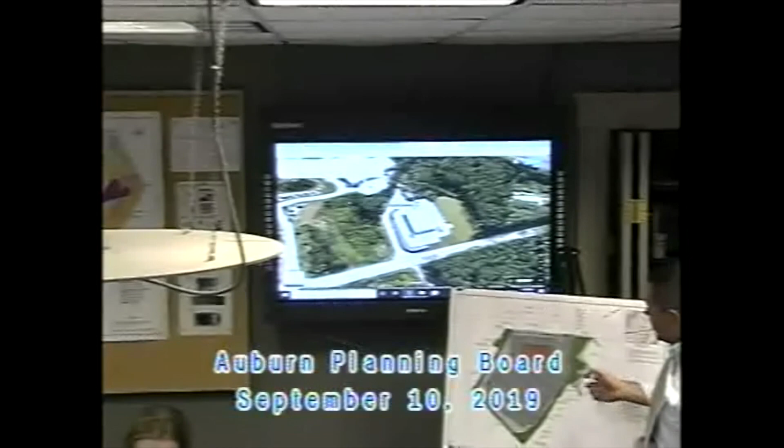Good evening, everyone. Patrick McCarty, McCarty Engineering. Here with me tonight is Neil Patrick, trustee of NJ Realty Trust. Thank you for having us back this evening to entertain a request to amend the approved site plan for the proposed Patrick Mazda project at 519 Washington Street. Oh, I'm sorry, 189, yeah. Got the Volvo Volkswagen on my head. 189 Washington Street.

So this is the plan that the board originally approved a couple months ago. Just to refresh everybody's memory, Route 20 here along the bottom, power lines, West Tech Drive, the existing cheerleading building that's now partially demolished. And this was the proposed Mazda dealership, and the access driveway ramped up from Washington Street to a platform that had the building and some parking. Then we continued to ramp up, and we had terraced parking as we went up the hill. So we had retaining wall parking several times up the hill.

After we received approval, we went through and did a full site work estimate. I think I mentioned to you last time that our company also self-performs the site work and builds the building. So we estimated this project, and it turned out to be pretty expensive to build the multiple tiers. The approved plan has 8 proposed retaining walls, a small one here, replacement of the one that's failing along the driveway, a small one here, and then 4, 5, 6, 7, and 8.

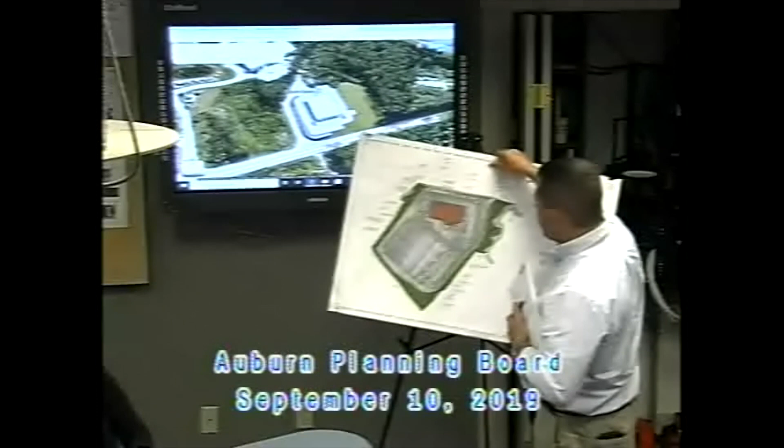So we had 8 retaining walls totaling almost 20,000 square feet of retaining wall face, and then a significant export of excess material. So having looked at that and realized that this design was going to be cost prohibitive, and I should note that the current approved plan has 388 parking spaces. So we did a little bit of redesign here. And we have the proposed plan that we're requesting the board's approval for.

The driveway stays the same, the whole building platform stays the same, retaining walls 1, 2, and 3 stay the same. Retaining wall 4 gets slightly taller, about 4 feet taller, and it also wraps up the driveway. And what this allows us to do is continue ramping all the way up to the top of the site. We off-grade a little bit from the property line to set this high corner elevation of the parking lot, and then we grade 5% diagonally across that, creating a more conventional parking layout. Spaces lining the perimeter, and then 3 rows of parking in the middle.

Saves us 4 retaining walls, which cuts the face of the retaining walls down almost in half. Saves some export of material, but the sacrifice is we only have 335 parking spaces now, so we're down 53 parking spaces from the original design. Not ideal for a car dealership, but gonna balance the economics of the site.

Did you say in the past that those were gonna be on the elevated areas, inventory cars? Or are they gonna be for the people? Inventory cars. And this is still inventory cars up here. The sales area will be on the first level where... Yeah, we have approximately 90 spaces down on this. So customers would come up, they'd park at the front of the showroom, they'd have parking here, service customers, everybody, all the business for the customers would occur on the same platform that's not changing. The new vehicle storage would just be now at the top of the hill rather than terraced up the hill.

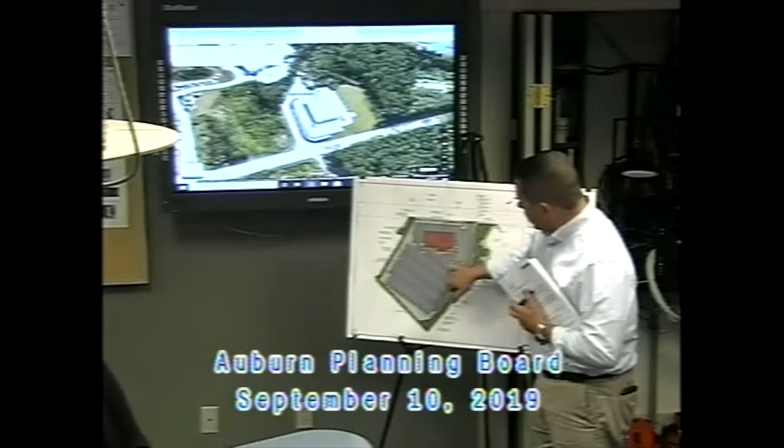It does reduce impervious area, obviously, because we're losing 50 spaces, so we have a reduction in impervious area, less retaining walls, less export. We had to redesign the drainage because each one of these tiers, they were all graded down, and there was a catch basin and an infiltrator at each one. So we had one large infiltrator here that we still have, and then we had 4 small ones. And now we have 2 big ones. One here and one here.

So the plans did go to Graves for peer review. They sent us a letter at about 4 o'clock today, which was great just to get it in time for the meeting. The 2 comments that they had was we have a condition on the original site plan approval that when we get down close enough to grade to dig the test pits, we're going to dig the test pits.

To confirm the depth of groundwater for the 2 infiltration basins. And then their second comment was on our StormTech detail sheet. One of them is still labeled as infiltration basin 5, even though now we only have 1 and 2. So it's fix the typo and do the test pits.

What was their request for the presence during the digging of the test holes? Yeah, that's a condition of site plan approval that would remain in effect, assuming the board acts favorably on this request. So the change would be the reference to the plans, the date of the plans in the site plan approval document. The rest of the document would remain the same.

And Adam, you concur with the 2 notes from Graves, and having an independent engineer witness the test pits? Mm-hmm. And I haven't fully read through this, but there are only very minor comments. Do we want to consider those tonight, or do we want to have opportunity to review those? We want to take the time to look at it. Yeah, it's very minor.

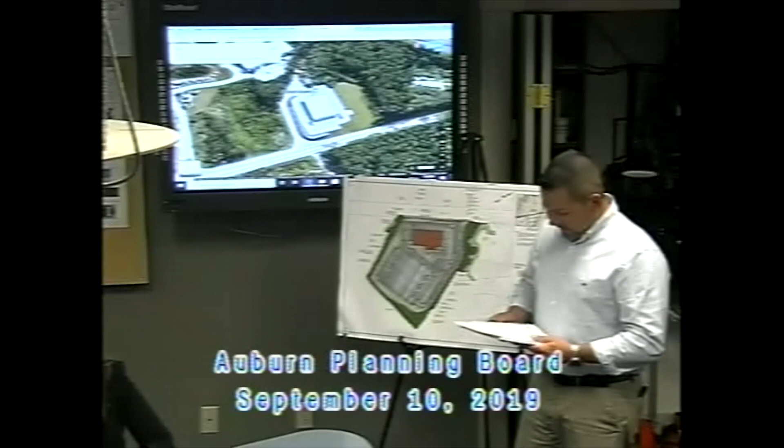Can we see that? Do you have? Because it's usually supposed to be here the Thursday before the meeting. Oh, their letter? Oh, yeah. Everything. You all right, Nick? Take a look. Structural review of the proposed deck. No, wrong letter, I'm sorry. Change packets. No decks. There you go. Definitely not done. Hydrology, water, culvert flow, pipe size calculations. Statement.

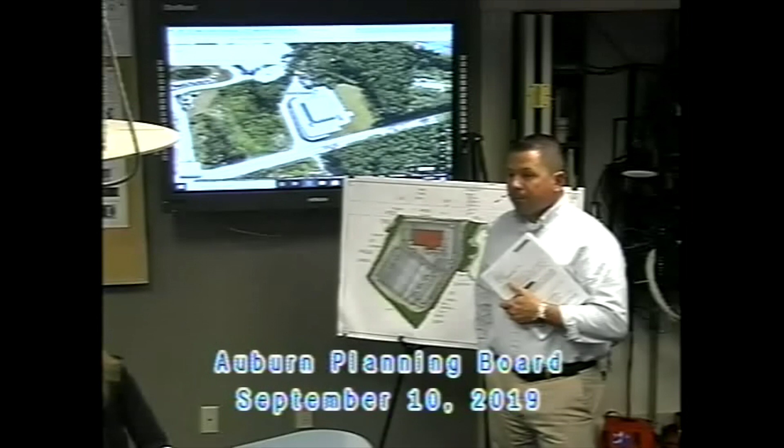Other questions, John? If he's done with his presentation, I got plenty. You all set? Okay, my first question is, we show the saw cut on page 2. That's within the state right of way? Yep. You got a permit from the state? I do. Two, actually. One for the curb cut and one for the sewer force main.

Page 4, general note 5: contractor shall strip topsoil and stockpile on site for reuse. Soil stockpile shall be no higher than 8 feet. Stockpile shall be enclosed by temporary silt fences to prevent travel of sediment to adjacent drainage ways. What about the hay bales or the wattles? We have wattles. That's not what it says. It just says silt fence. Your instructions to the contractor, which is you, is to put silt fence down. It doesn't say anything about wattles. Okay. Add that.

Drainage generated as a result of dewatering shall be discharged to existing drainage courses with proper erosion control measures. Discharge onto pavement or private property shall not be allowed. So there's no provision in there on how any silt that gets through the system is handled during the dewatering. There's a whole stormwater pollution prevention plan put together for the site, because we're disturbing more than an acre. So we have the SWPPP, we've been doing the inspections, we filed for coverage under the EPA general permit. And we haven't done any dewatering to date.

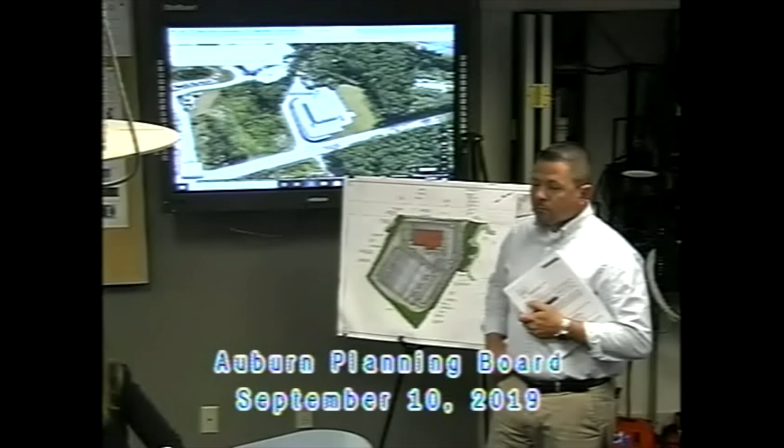When you tie into the new manhole, that has to be a core and seal boot as well. It says core, it just doesn't say anything about a boot on your note. On which one, John? Sheet 6. What number? No, it's not a number, it's on the plan itself. It says core new opening, where we tie into the existing manhole. It just has to say core and seal boot. So you'll add that to the plan?

Okay. The other thing, just a quick question on that. So we get the plans, they print them out, I get one page right side up, the next page is upside down. The state highway baseline on sheet 3, it's got an arrow, but it's pointing nowhere, there's no line on the page. I don't know if that was just the center of the highway or what. At least not on my copy. On sheet 3, right below proposed guide rail, state highway baseline.

It'd be nice if my set had sheet 3. Oh, here it is. State highway baseline, it's pointing to the middle line with the stationing. I think maybe the leader didn't show up on your copy. No stationing, no middle line, no nothing. Like you just showed, it's pointing in the middle of nowhere. Well, I think it's just your copy. See how it's light on mine? Here's the baseline and the stationing on the full size. I think it's just your half-size copy.

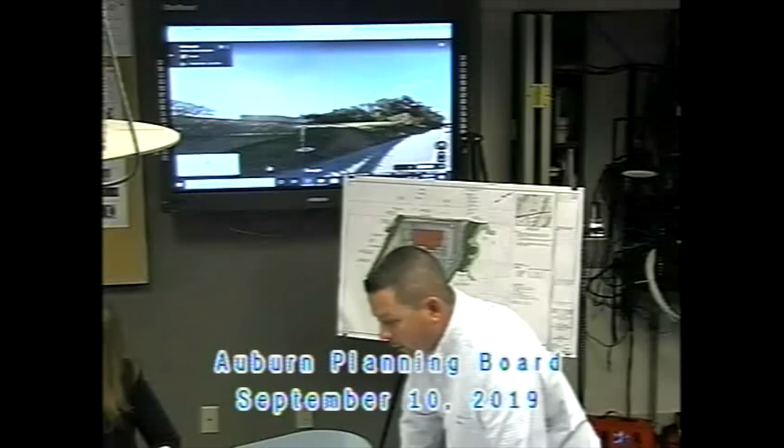What is this one, John? This is on the landscape plan. Yeah, so those trees are up here. Okay. You can't really tell where the center of the tree is the way it's drawn on the landscape plan, as far as concerned. So there's a Mass Highway bound right here. Yep, they're behind it. They're behind the Mass Highway bound. Thank you.

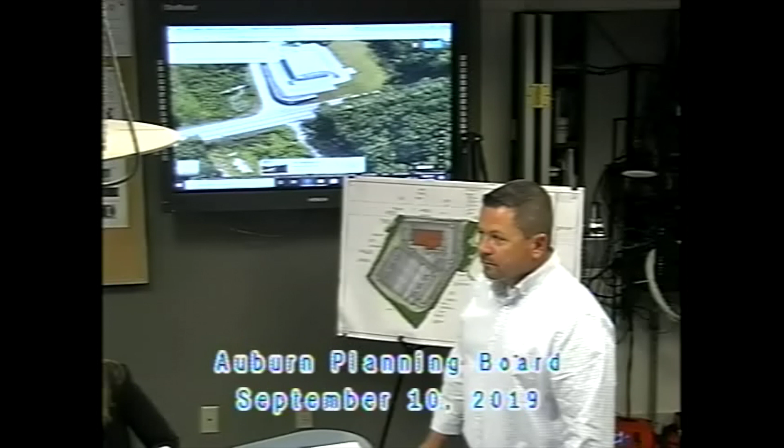I'd like to take another look at... Now we'll get to the details. I thought we went through these ones already.

Yeah, by E.J. Prescott. Mine says casting shall be covered to be LeBaron Type A mass standard product number 65306, set by E.J. Prescott, full bed of mortar. That's telling me that E.J. Prescott sent me frame and cover. Which detail are you looking at? Sheet 10, center of the page, top, one right below it. LeBaron.

They're in heavy. Yeah. E.J. Prescott. It's the next one down too. Yeah, he didn't write it the same. On the one below, he put by E.J. Prescott set in a full bed of mortar. He put the sets in the wrong place on the one up top. But I don't care about who sets it. I care about the reference to a company that no longer exists.

But they still call them out by that product number. They don't exist. LeBaron doesn't exist anymore. They've been bought out. It's time to upgrade your reference numbers, because you can't reference that. There's no more catalogs for LeBaron. You fixed it on the previous plan. You referenced Auburn Standard, which is fine with me. But here, there was no change on the sheet from the previous plan. Yeah, the frame and cover has been changed back to what it was originally.

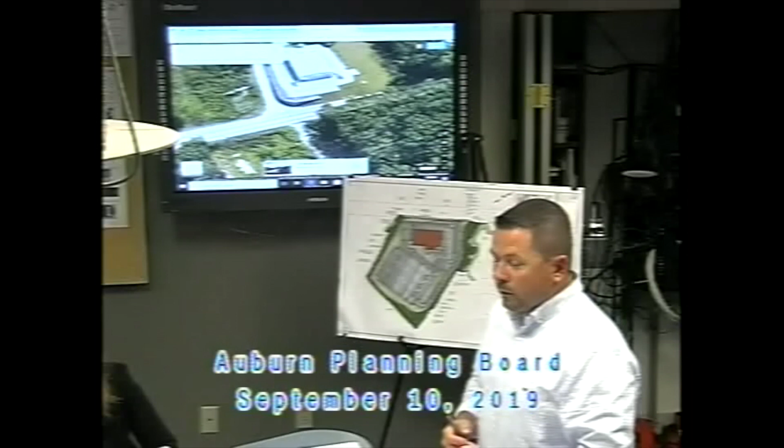My other question is, where you have your slide rails in for when you pull the pump up, you show the detail of the cable underneath the lip of the flat top. I don't know how you reach in and grab that. I don't know how close that is. There isn't really a dimension between that and the top. You know what I mean? Yep. You can actually run that up and tie it onto the frame or on the bracket that comes out that holds the slide rail. Because you're gonna hook it anyway when you pull it up.

And then the only other question I had was, is the hatch draining into the pump station? The hatch is gasketed and it does have a little trough around it. Minimally, it's pitched away from it, but yeah, minimal infiltration. That's all I have.

Are you sure? Yeah, I'm sure. You got all that down? Yeah. Okay, good. Rach, you got all that? Yes. It is what it is. Any more? Mike, are you ready? Hold their feet to the fire. I'm good. I gave John all my questions before. Oh, we thank you. Where's my cheat sheet? Did you have any questions? No? Okay. Nick? No, all set. John, you're good? I'm all set. Any questions from the audience?

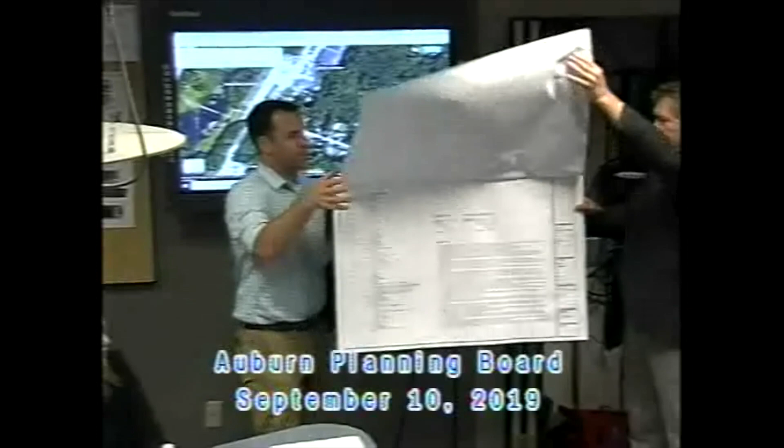I'll just run through. The lot configuration has not changed. One of Graves' comments was just adjusting one of the irregularity factors, so there's a minor change on this sheet. In general, many of the changes had to do with the stormwater requirements, which we've updated as part of the resubmission, and we've done a test pit recently, and that helped update some of the stormwater figures for Graves' review, as well as the basin geometry changed, so I understand they'll probably have to have more time to review.

Some of the comments that Don had spoke of: the sewer department had questioned if this should be considered a private road, and we're proposing a public road after the completion of the project. And to provide a 6-inch stub at the end of the sewer line for the use of the abutting property, or to extend. Obviously, we can make those adjustments, plan revisions. And they had questions on some of the sewer manholes.

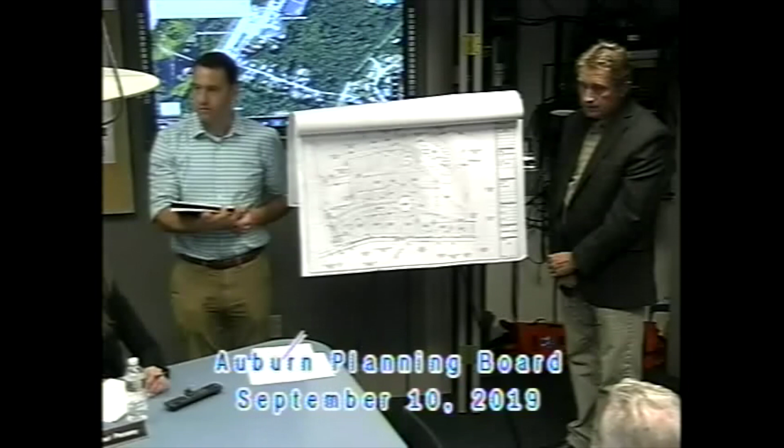I'd like to go back to the sewer line. You mentioned something about a 6-inch stub. Yeah, it was requested to provide a 6-inch stub at the end of our sewer line in order to service this property here if needed, in the event that they would like to tie in. Oh, the abutter? Yeah, just for future use. It's a call by the sewer department just this morning. Oh, that's fine. But it's got to go to the property line, you can't stop just short. Correct. Sewer had comments this morning. Oh, I wouldn't have thought it either. Okay.

So is there a sheet here that shows the frontage for each one of these lots and where they're coming off of? Yeah, we can provide that as a chart, it might make it easier to convey, because I do agree sometimes it gets lost. Well, it should be on the plan now too. Yes, it's shown as part of the configuration for each lot. However, maybe it could get lost in some of the notes. Because some of your printing is printing over other printing. It makes it very difficult to read. That should be separated. It gets confusing. Okay.

And is this whole area gonna be completely clear cut? It already is. It'll be clear cut. Oh, yeah, they cut that last year. How are you guys doing with stormwater runoff over there? Any issues right now with no trees? You know, I'm very surprised, but we haven't had any problems. We've had a couple of doozies for storms. Put in a silt fence until just a few weeks ago.

The weeds are pretty high right now. They're huge, they're taller than that. As a matter of fact, it's very dangerous to pull out of Eaton Ave onto Hampton Street. You can't see a thing right now. You couldn't before with the trees either. Okay, if you want to continue, we'll ask as we go.

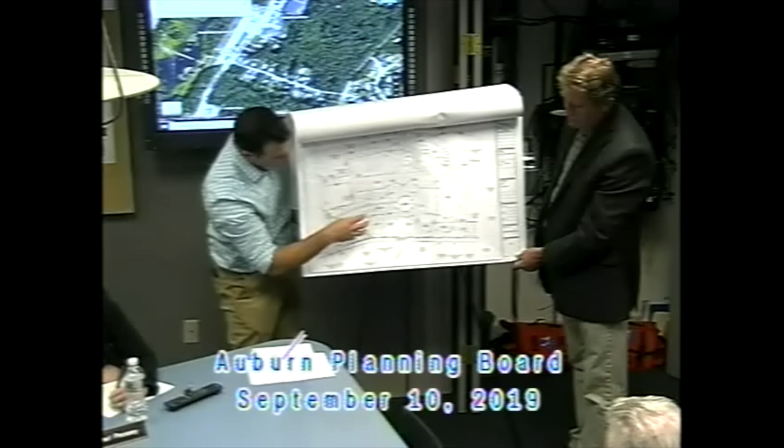so yes, obviously this site is steep, so the grade is coming down here. We're proposing a swale along this side of the road that will enter into a catch basin at this end, and then that will go to the storm basin, in hopes to reduce the runoff across the roadway. And then along this back edge, we propose a stone-lined swale that will run to the same basin to mitigate any runoff coming down that slope, because it is a long slope. Our goal is to try to capture that so we don't have any issues of stuff migrating off-site.

You can't increase flow onto a neighbor's lot during a peak rainstorm. Correct. That's why we're proposing those swales. Well, you're not supposed to. Well, that's a whole different story.

This lot right here? Yes. And it's got that leg that stops short of Eaton Ave? Correct. Okay? And then you got 60-foot wide here, and then you got sewer easement. Where is the sewer easement? It doesn't quite point to that. What is that? The sewer line easement will encompass that whole area that comes out, that 60-foot wide area. That wouldn't be a future, that would just be the sewer easement. It's not an entrance into that lot.

No, because it wouldn't meet the frontage. So this whole thing is sewer easement, but it shows it with that leg stopping. Yeah, we can provide like a shaded plan to show the easement and the lots. Is there an existing sewer manhole at Eaton Street to tie into, or do you have to extend the line up the street? No, there's an existing sewer manhole approximately here. Okay. And then you're running the water line down Hampton and down Eaton and in. Correct.

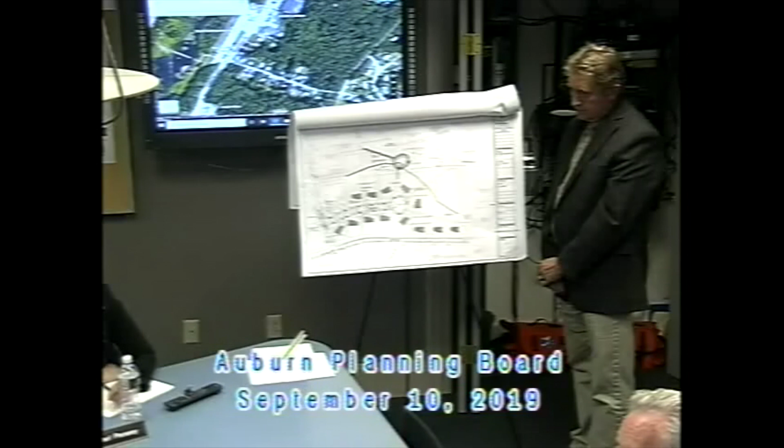Is this fine line here the swale? It's not these lines that are all close to the edge of the road, is it? No, this dashed line, that is the bottom of the swale. The swale's in between those two dash lines. And that's coming down here, is that the idea? No, there's a catch basin at the end that, on the drainage plans, comes to a manhole here that flows into this area. Oh, it's gonna come around here and then down. And that drainage area exits on Vesper Street. Correct, so in order to service the stormwater basin, there'll be an access gate and access road on Vesper Street.

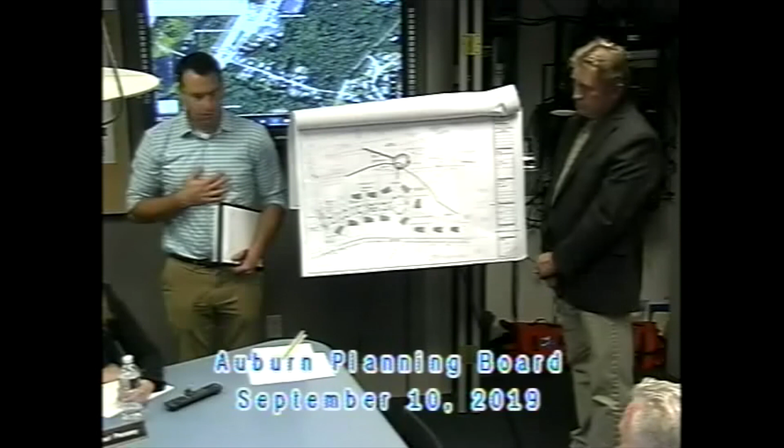Yeah. We have to wait for Graves to comment. Yeah, definitely. Okay, whatever else on the list. Other updates from the last meeting. One of the gentlemen had asked for a guardrail on the downhill side of the entry. I'm sorry, it was you, sir. Yeah. So we're gonna incorporate the guardrail here. Another gentleman up here asked for a row of arborvitae at the top of the slope here. So we're gonna incorporate that as well.

Another question is, you can't get a variance to extend that cul-de-sac? I don't know. Where did you see the regulation that said you can only put that? In the subdivision regs? Yeah, I actually discussed it a little bit with Bill Coyle as well. And we can find that, I can send it back so it's easier. Yeah, we'll look at it too. Just makes it easier, much easier all the way around.

Right, I mean, the house can move away from Hampton Street, maybe coming down the new street, Road A, out on Eaton Street, instead of trying to get out on Hampton Street, which is a nightmare anyway. Super dangerous, especially in that area. It's a tough area, right on a bad corner. Horrible, yeah. Well, like you say, we'll have to wait to see the peer review and what they have to say. I don't know who would grant that waiver, will it be ZBA or Bill? Nice to have Bill's comment on it. It is something that we just haven't thought about.

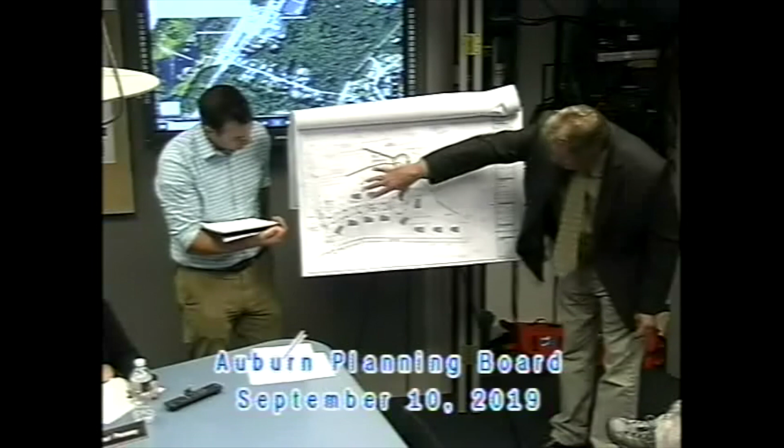One of the requirements is we have to do hydraulic calculations. So we do a pre and a post study. We're not allowed to create any more runoff than what's currently there now. And if anything, we're capturing as much of the water as we possibly could, putting it into the system, and that's the whole idea behind the detention pond.

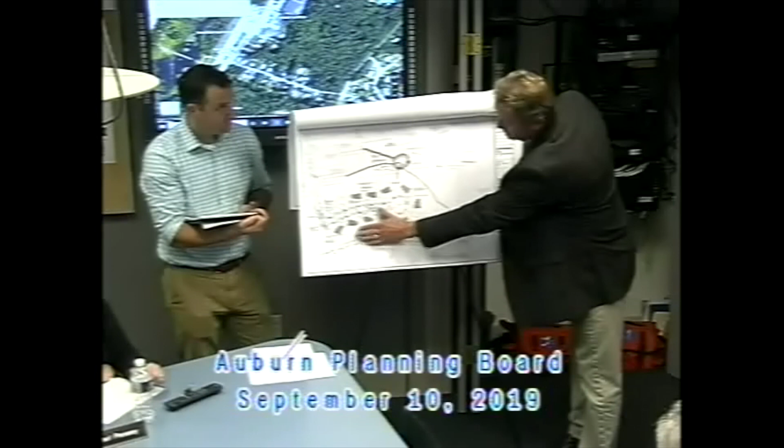You're getting some runoff now, just some runoff over a vegetated slope. Obviously, when they open it up, it increases the amount of runoff, but the standard that we're held to, and this is something Graves will review, we have to capture that water, put it in a closed system, bring it down and bring it into this basin. If we don't meet that criteria, then it's a basis for denial.

So, are you planning on coming in and doing all the grades and the retention pond and laying all the pipe, and not building one house at a time? There'll be a sequence of work, but that's the right way to do it. Right. Okay.

I have just one more thing. Would someone come up to the house and take a picture of my basement and my driveway in case something did happen? I'd like to know who to contact if that did happen, and I'd like it in writing that the property would be taken care of. It'd be a good idea to document all of that. Can I do it myself? Yeah, you can. I just didn't know if someone needed to be present as a witness. You can bring your insurance agent out for that.

Bring the insurance agent as a witness? Okay, I'm definitely gonna do that because I'm a little nervous. I think you guys are very smart, very diligent people, but I'm still a little nervous. There will be a bond on this project as well, a performance bond, so they've got to perform to a certain standard.

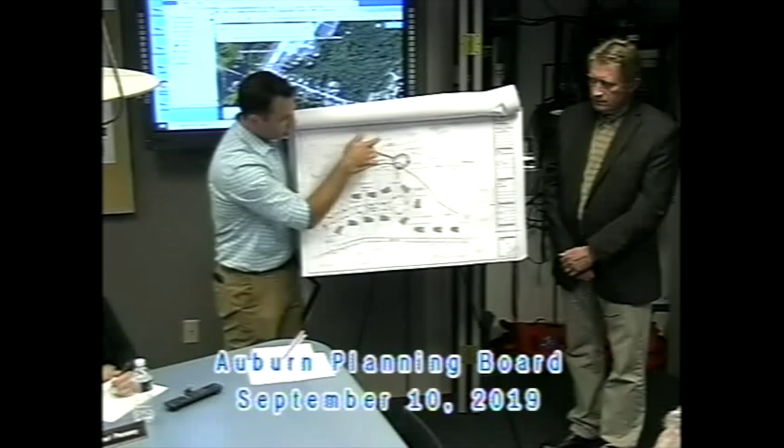As far as the access road, that does have to go up a little bit, because this is a steep site, in order to access the top of the pond. We can provide, as on other projects I've done, a small culvert or some little swales for the drainage to make sure that on the roadway it stays on the site, and that would be part of the calculations that we have to illustrate to Graves to show that we're not increasing runoff to these other sites. Just to add, it's a gravel road. Yeah, it's a 10-foot wide gravel road, but yes, it could be a natural low point that we'll try to mitigate.

Mr. Brooks? So when it goes into the detention pond, then it runs through culverts or open trench down to Vespa? Your access road goes in here, your overflow is here down to the wetland. So when this gets overtaken by a 100-year storm, it's going to come out this way to the wetland. Okay, so this is just a road going to Vespa. Correct. So they can maintain that basin so that it goes all the way around. This should not happen, because water's going to find its way to the lowest point.

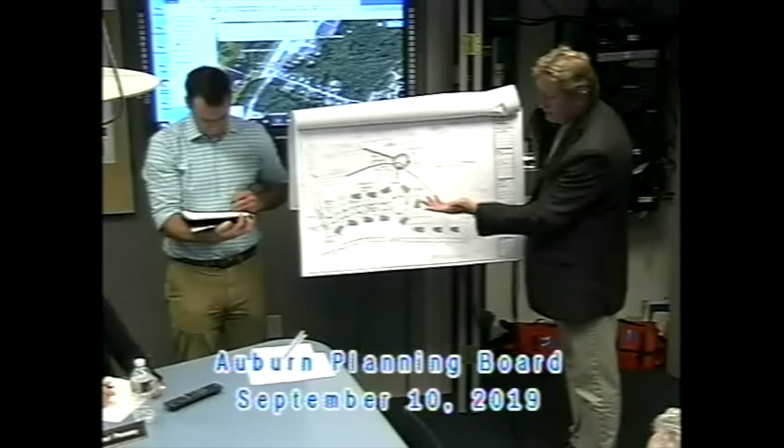The intent for the basin is infiltration through the bottom of the basin, which is why we did a deep hole test and a perc test to determine that it wasn't a hunk of ledge. We provided that information to Graves: we had a 4-minute perc rate, and they got down just over 8 feet in depth, no groundwater encountered, and no ledge where the detention pond is. No ledge anywhere on the site? No, there definitely is.

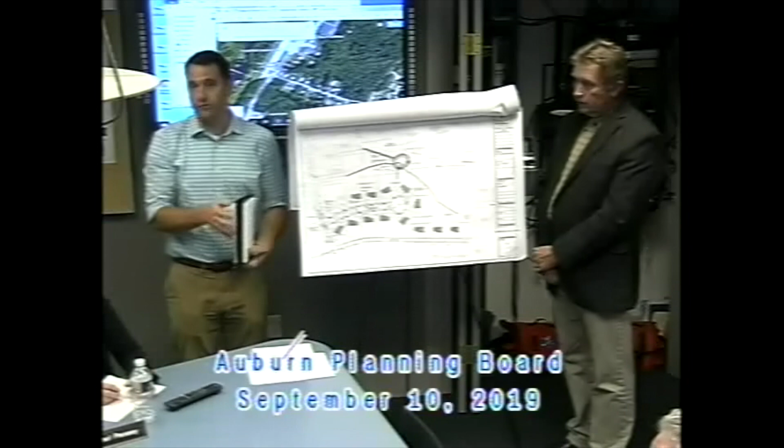So is there going to be blasting then? We're not proposing any; they're going to try to address the ledge removal with hammers. Being concerned with your foundation and everything, they have to have the insurance company come out and photograph everything, like a pre-blast survey. And if they're going to hammer, they have to put out seismic monitors. If it goes over a certain velocity, the shock wave, they have to shut down. That's with the hammers too? Yep, any kind of ledge demolition. The only time you wouldn't do it is if you were using Bristar, which is just a chemical reaction that expands and breaks the concrete.

Any other questions? So, at the end of Vespa right now, there's a pretty good banking. The road is much lower than the property, so you're going to cut into that. How's the water now going to flow into Vespa? I'm going to look out for the Vespa residents now. And is Vespa Street part of this property? Because that was a private road. Again, Mr. Sadowski, that basin they're proposing is going to bring that water away from Vesper Street. But they've got to cut into the banking to make the roadway. So you've got a wall right now at the end of Vespa that's probably 6 feet high, if not 8.

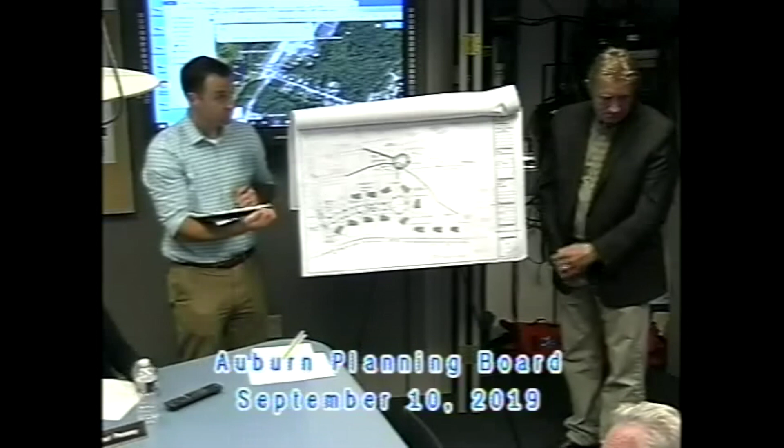Just one thing. These houses here, I know we're looking at making them part of the subdivision or the access to the road. But with the plans that you have, would you have any land usable in the back, or would it just fall right off for these three homes? After you get out of this envelope, it's just gonna continue to go down. So it won't be usable land for these people's backyard? When we graded it, we used I think a 25-foot wide shallow slope, and then it will start. So at least the people will have a backyard. What's the shallow slope? I don't know, like 6-to-1 or something like that. That's pretty good.

One more question, on those 3 lots, I believe right now there's a guardrail in front of them. Correct. So would the guardrail go away? Yes, to provide access. Just to provide access at the driveway, and the rest of the guardrail will remain, or will all of the guardrail be removed? We're elevating the front of the building, so the driveway almost comes in flush with the street, and they drop the lot down and exit through their cellar doors to a walkout. So the guardrail would get truncated in front of the 3 here, but it would remain over in this area here. Okay.